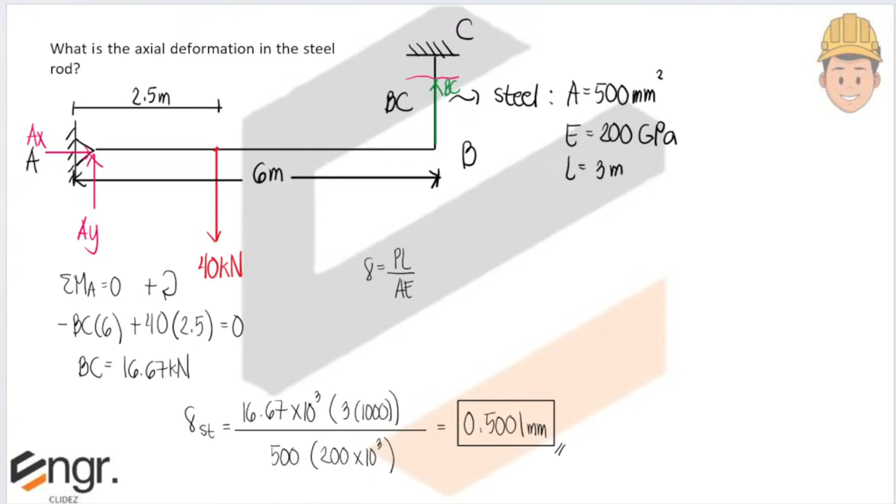Now, kapag Canon yung calculator mo, iba yung pag-input sa, parang, let's say, 1 times 10 to the 3 equal to 1,000. Kapag dito ka sa Canon, 1, ito lang, E. Then, multiplied by 3. Same lang yan. But, EXP lang siya sa Canon.

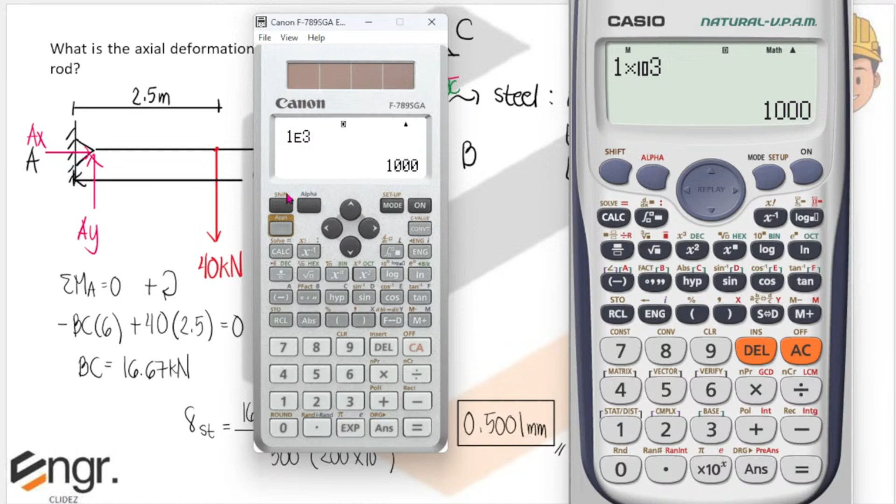Ito naman. For this problem, sinadya ko na walang length na binigay. But, sinabi dyan na yung W acts at the center. So, kapag mag-act sa center yung W, automatic na yung dadalhin ng rods na andun sa each end would be half of the applied load. So, essentially, yung force dyan sa aluminum, yung solution is by symmetry. Force in aluminum equals force doon sa steel, equal to half of W. So, 10/2 is equal to 5 kilonewtons.

So, PAL, PST. Now, magkaiba yung materials, magkaiba din yung lengths nila. So, magkaiba din yung deformations. So, isusolve natin yung individual deformations nila. So, for the aluminum, delta aluminum, yung force niya is equal to 5 kilonewtons. So, 5, yung length naman is equal to 2 meters. Hindi pala magkaiba yung length, uniform lang pala. Sa ibang example ko pala, iniba yung length.

So, 5 times 2, ito naka kN, ito naka meters. So, just multiply this by 10 to the 6. Parang dalawang times 1,000 yan kapag 10 to the 6. Then, yung area naman is diameter yung binigay. So, kailangan naka pi over 4 times d squared. Tapos, yung E is equal to 100 GPa. Convert also to MPa. 100 times 10 to the 3. So, this would be equal to 0.318 mm.

Now, i-exaggerate na lang natin yung lengths para mas makita talaga natin yung figure. So, ito yung deformation ng aluminum, which is greater than the deformation dun sa steel. This is 0.318 mm. Then, dun sa steel naman, maliit lang yung deformation niya compared dun sa aluminum.

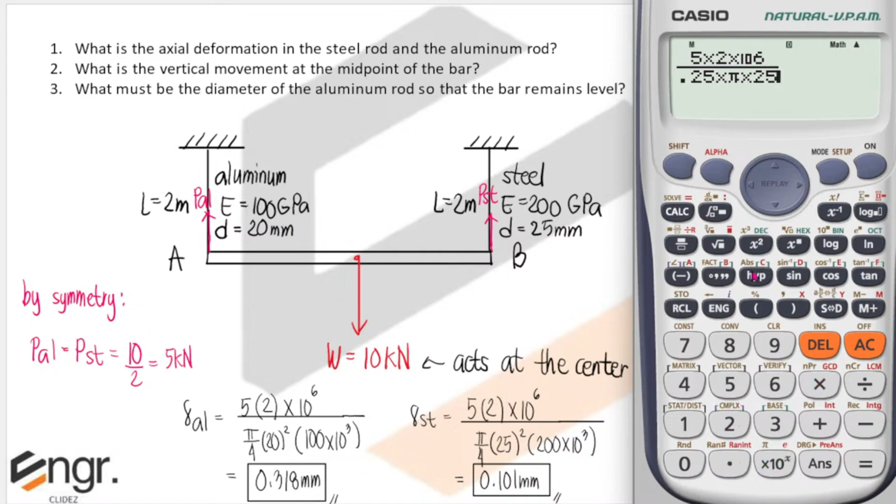And then, this is just equal to 0.101. Pero I think, check natin yung value, 0.102 kasi yung ginamit ko sa class. Ayan, 0.102 pala to kapag 3 decimal places.

So now, since mas naglengthen yung aluminum compared sa steel, yung final position ng bar is magtitilt na siya. Parang ganyan. So kapag ito na yung orientation ng bar, nakatilt na siya. To solve the vertical movement at the midpoint of the bar, kailangan natin yung distance na to.

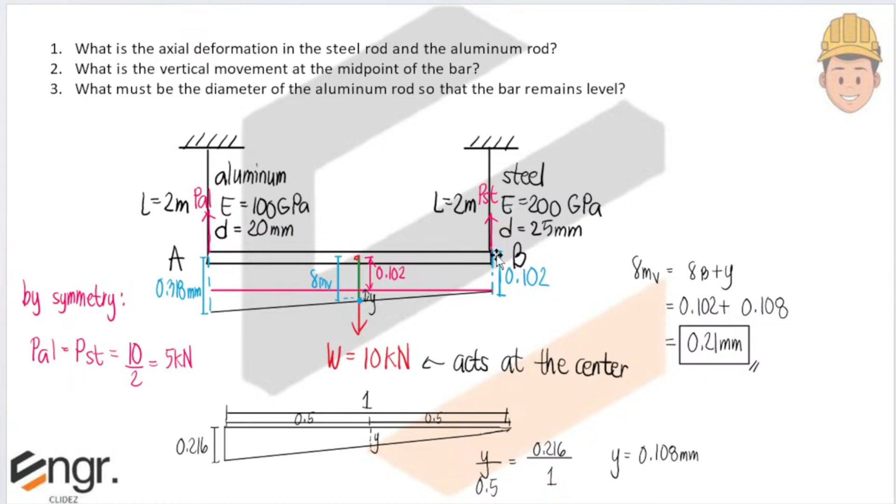Now, for number 3, what must be the diameter of the aluminum rod so that the bar remains level? So, yung tanong is, how can we make this bar, even after the application of the load, still horizontal? Nag-tilt siya since yung aluminum, mas malaki yung elongation niya compared sa steel. So, for bar AB to remain level, the deformation of aluminum must be equal to the deformation of steel para hindi na siya mag-tilt.

So, what we need to do is to decrease the deformation doon sa aluminum, kasi yan yung i-change natin sa design. Palalakihin natin yung diameter niya para liliit yung deformation. So, for number 3, the deformation in aluminum must be equal to the deformation of steel. Yung deformation ng steel, nakuha na natin, equal to 0.102 mm. Yan yung ililimit natin sa deformation ng aluminum.

So, P is still 5 kN. L is equal to 2, then times 1000 squared, or 10 to the 6. Then divided by pi over 4, times the new diameter, d new, squared. Or pwedeng d na lang, since isa lang yung diameter na hinahanap. Then yung E is 100 GPa, 100 times 10 to the 3.

So solving the diameter, 5 times 2 E6, then pi over 4 times 100 E3. Yung D, since naka-square siya at nasa denominator, ilagay mo na lang sa kabilang side ng equation. So 0.102 times D squared, para mas madaling mag-process yung calculator, lalo na kapag Canon yung ginagamit mo.

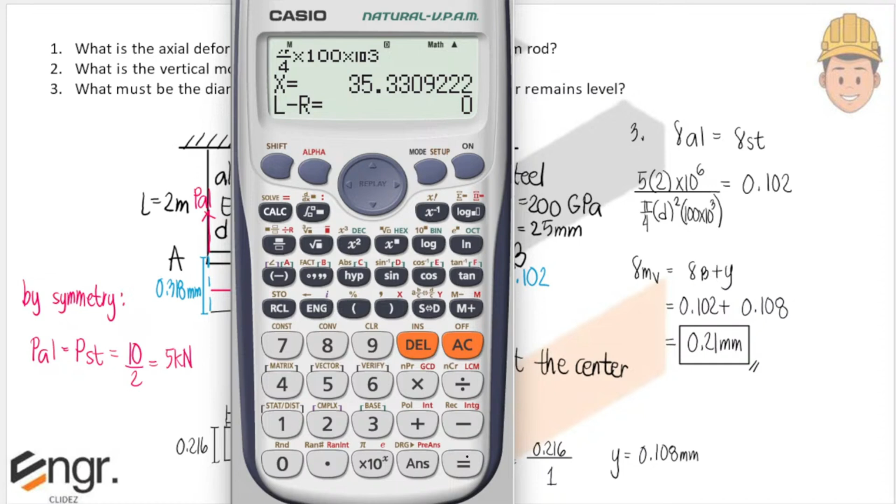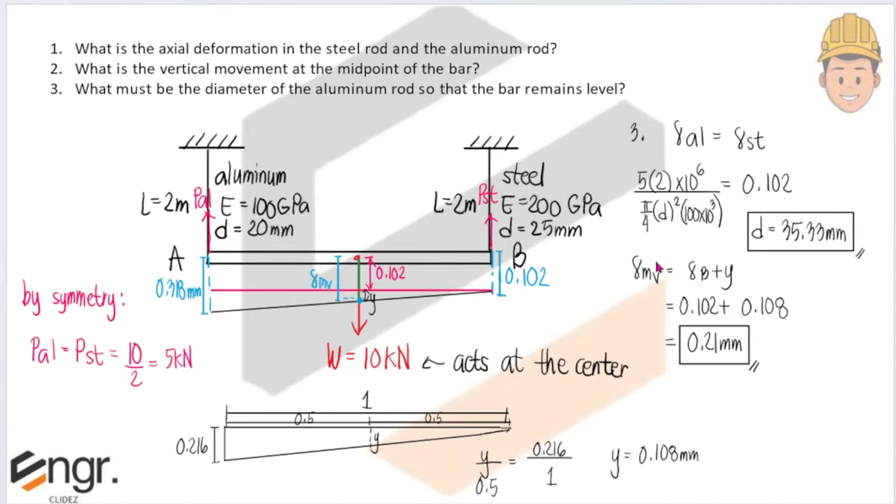So solving the diameter, we would get 35.33. So mas malaki pala yung D, mas maganda kasi mas liliit yung deformation. Yung steel kasi malaki yung E niya, 200 GPa, tapos yung aluminum is only 100. Kaya doon ka babawi sa D.